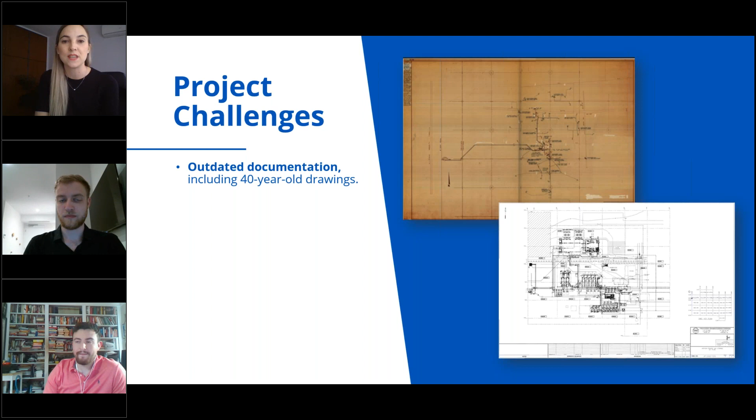So we found 4 specific challenges for this project. The first was the outdated documentation. Back then, when our technician went inside to do the scanning, they provided him with a really large hard drive with a bunch of documentation that was really messy. There were a lot of hand-drawn documents from different areas that we weren't sure where those were located, and other CAD drawings as well. So it was really difficult for us to get nice information to upload to the models.

On the other hand, we had to create a lot of custom modeling. This is because of the nature of the project - it was not content you could easily find in the Revit standard library. So we had to go ahead and model a lot of custom valves and unique mechanical equipment, and that took a considerable amount of time.

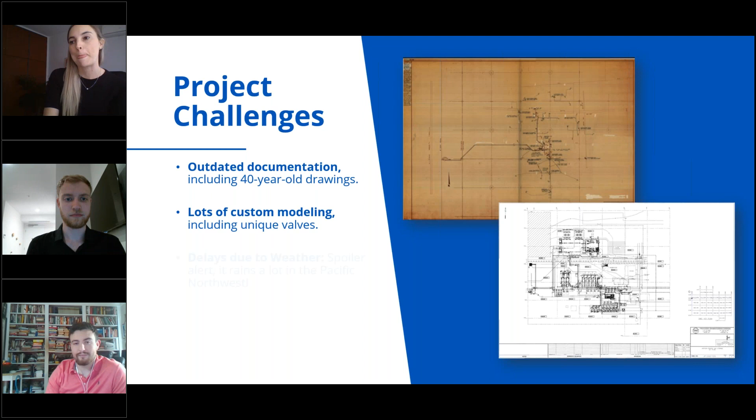Another challenge we found back then was the weather. As you might know, it rains a lot in Washington State. We scanned in November, which is when the rainy season starts, so we got a lot of delay on the scanning due to the rain season.

And the last one was a tight deadline. Our FM team and our YouBIM team needed the models immediately. So we operated under a 1-month timeline, and we had to create the entire Revit model for the project in that time - one single month.

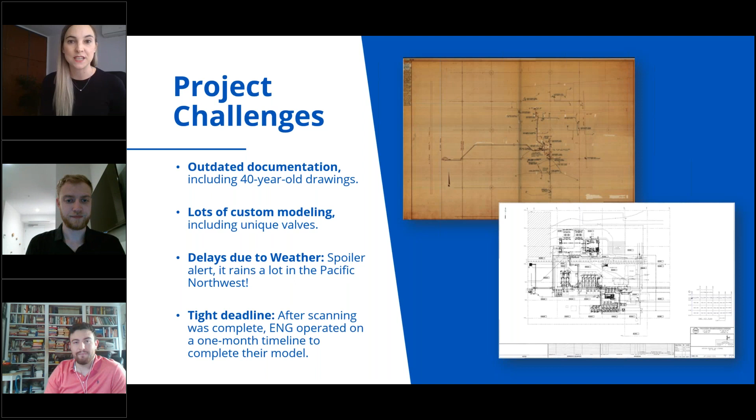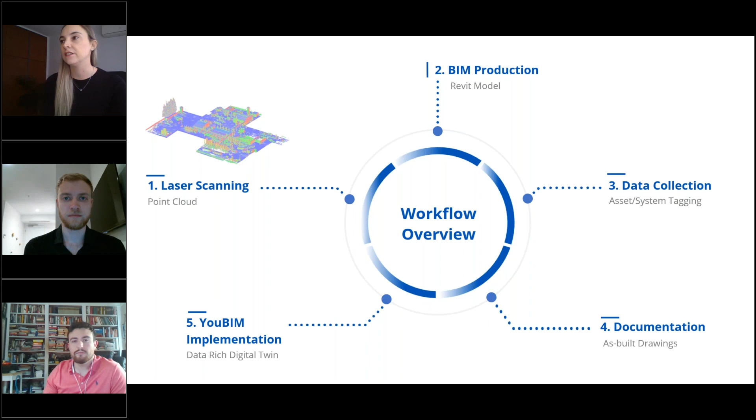I brought this graphic here because it clearly represents what a scan to FM project looks like at ENG. Essentially, we started doing the laser scanning. It's not just about going to a site, bringing your hardware, and starting to scan - there's a lot of coordination that needs to happen before our technician sets foot on the ground. We coordinate all the needs - accommodation, transportation - to make sure our technician has everything he needs when he starts scanning.

For sure, BIM Production has a lot of tools I'll dive deeper into later today, but regular BIM modeling and data collection was key for this particular project. We captured the data from 2 different sources - whatever we could find in the 2D drawings, but we also took pictures of the asset tags, where we could find information regarding serial numbers, manufacturer information, model numbers, and so on.

That data was collected, loaded into the models, and uploaded to YouBIM to enable easier day-to-day operation for our client. After that, whenever we have the systems information, we could set up drawings or filters and provide our client with true as-built conditions documentation for their building. Finally, we uploaded the data plus the 3D model to YouBIM, and that was all.

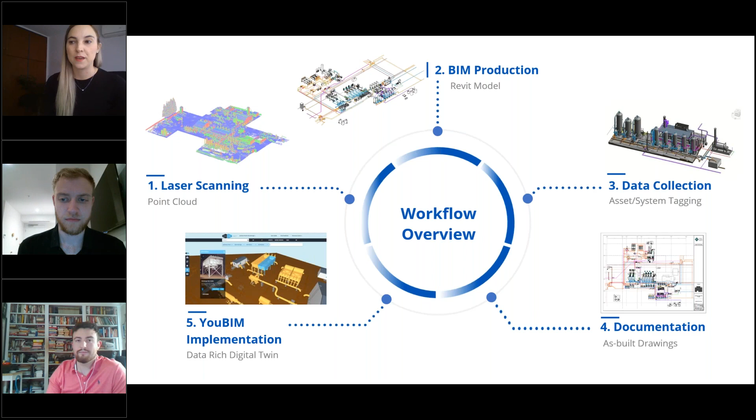This is basically a zoom of our process - how we internally manage this type of project at ENG. Processes and standards are key in our company, not only because they help ensure the integrity of our deliverables, but also to make sure our client has the best possible experience while their project is developed.

So essentially, we start with a project kickoff meeting. We do the regular PMing stuff, talking to a client, making sure we are all on the same page in terms of where are we going to scan, or which deliverables are we going to produce. And finally, the file transfers. If you're familiar with point clouds, you know they are really heavy files to handle, so we need to coordinate that in advance to avoid rework.

As far as the laser scanning, there is a lot of site work, which is the most common one: technician being on site, scanning, defining which specific hardware you're going to use, coordinating the mobilization. What I think is critical here is also the building access, so we need to provide our technician with a contact point, a person that can help him open any locked space he might find while scanning.

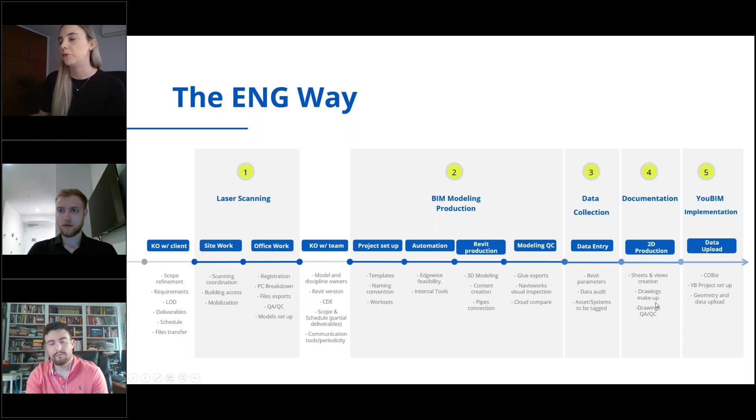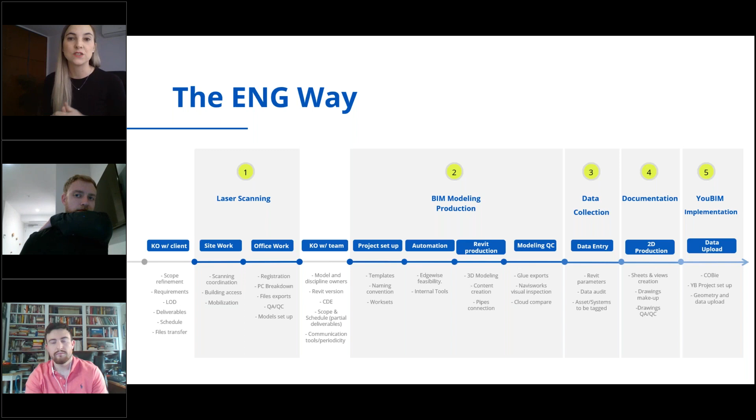After that, just regular Revit documentation, and finally YouBIM implementation. We need to know how we're going to upload the data, how we're going to upload the geometry, and make sure everything is linked together in YouBIM.

Specifically about laser scanning for this particular project, we partnered with Trimble. We scanned more than 200,000 square feet of area, provided more than 300 scans, and it took us one week to scan the entire facility, both outdoors and the small buildings inside. We used terrestrial hardware for that.

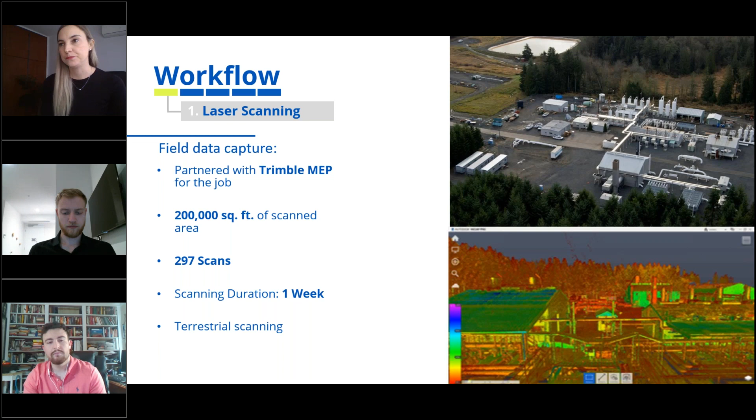I really wanted to bring this image here because this is how our technician structured the data after he completed the scanning. So this zoning here was the zoning breakdown that our client was familiar with, so we decided to just keep that, so it was easier for them and for us to handle the data.

That being said, we just provided them with 13 point clouds. We try to keep them small if possible. We regularly try to keep our point clouds between 5 and 8 gigs, we can say 10 as well. But because we know our machines are really good and can handle large files, you don't know from your client's team if they're going to be able to handle these heavy files.

And also to simplify the Revit work, right? Did you guys, when you scanned this, did you do it in color too? No, black and white. Black and white? Okay, it was too much, right?

Okay, so finally we defined a point cloud origin, and well, that's key. I don't know how many Revit users we have in the audience, but we as Revit users know that Revit doesn't like the geometry to be far away from Revit's internal origin. So we normally try to make sure our point cloud's origin is really close to the building geometry.

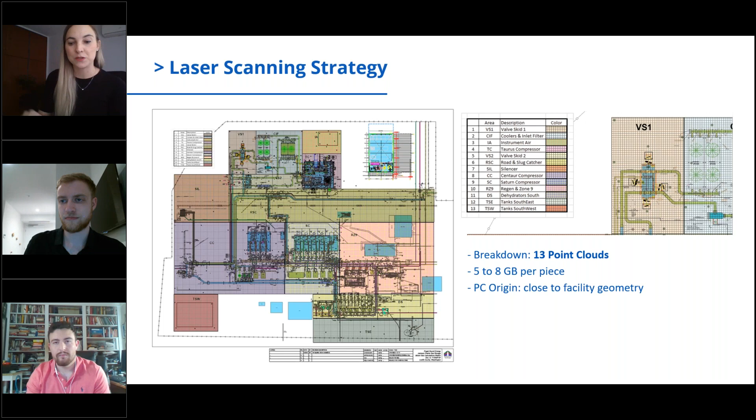So this was a spreadsheet scan location matrix that our technician gave to us. I think it was really nice to count with this, a really nice way of organizing the data. So basically each RCS file was loaded in this spreadsheet, and we were really easily able to identify which area each of them belonged to.

So here you can see also their scan location record. There's a really small green circle here with each scan number. So it was really practical for us to build those RCP files, because we were just using the drawing plus the Excel file, and that was really straightforward.

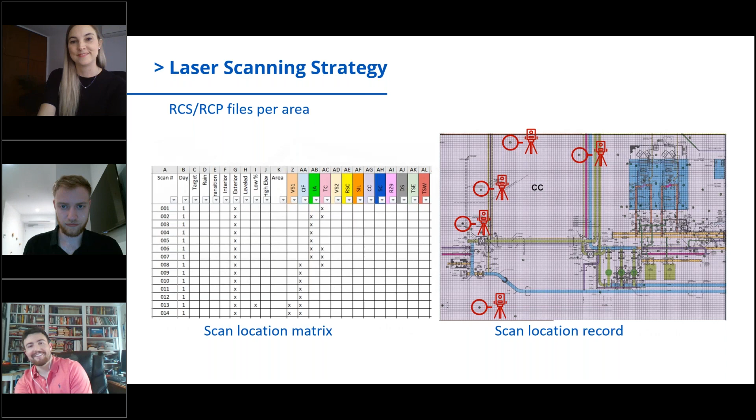I absolutely love that little thing right there. I love that. Right? Now we get to, I think we got the fun part coming up next.

There we go. Yeah, so basically these were the deliverables of this particular project, but this is what we normally ask our technicians to provide: a structured RCP file that we normally use for Edgewise, and a decimated file for Revit work. So we have a lower density file, easy to use to link different applications like Revit, Navisworks, ReCap, or whatever we need.

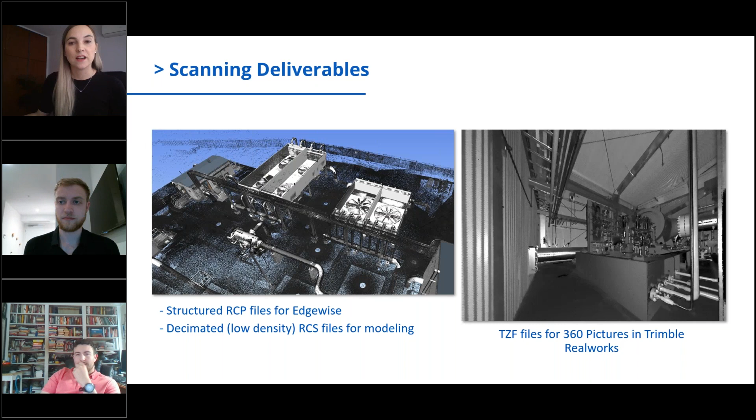And finally, our technician provided TZF files, so we were able to see the 360 pictures with Trimble Realworks to complete the modeling or to check any system tag or equipment tag on site. And that was really helpful, mostly for the modeling scope.

So this was the final resulting point cloud. What we did here was just trim the boundary of our scope of work, because since this was an outdoor scan, there was a lot of data captured by the scanner that we were not really into modeling. So we wanted to keep our modeling times down as much as possible.

I see, so that's everything, like the inside, the outside data, all that right there. That's what you guys did exactly, your final. Yeah, no, that's fantastic. Yeah, we didn't have time to lose.

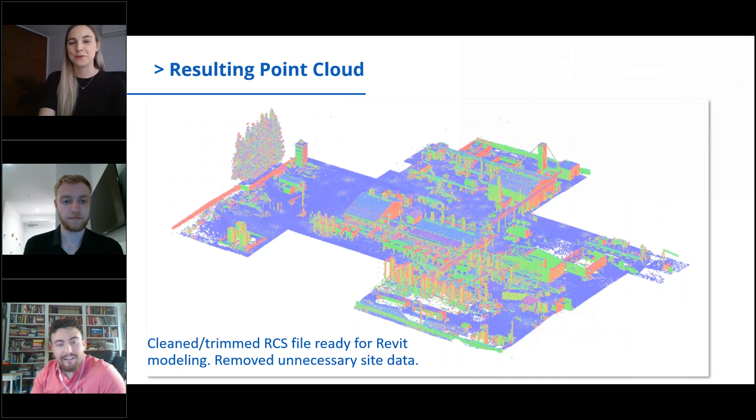So point cloud QC, I'll spend a little bit of time here. Based on our experience, there's a lot of excitement whenever you have your point cloud and the team is ready and you want to kick off the project right now. But something we've learned with time is that you need to make sure your point cloud is perfect right before you place any geometry in your models.

The farther along you are in your project, the more painful it will be for your modelers to correct that if your point cloud has issues. So that is something we learned the hard way, and it isn't happening to us anymore, right?

So registration issues, what am I talking about? We look for duplicated scans, alignment issues. Sometimes whenever we receive point clouds from our clients, they're not aligned orthogonally to our Revit X and Y. We know that Revit doesn't like us to rotate systems whenever those are already modeled, so we want to try to avoid those risks as much as possible.

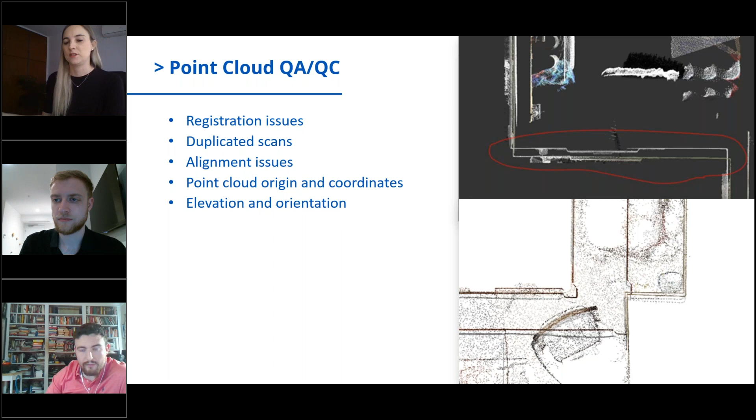Okay, so just to confirm, you guys actually went through and filtered and corrected the point cloud before doing anything further downstream. Yeah, yeah, okay.

All right, so BIM production, let's have some fun here. Basically our Revit model, we model all the architecture and structure to an LOD 200 because our client didn't need more than that. We just use the architecture and structure as context for the drawings, but we're not really into having those with a lot of information.

And we focus on the MEPs, so we model everything up to LOD 350. As you can imagine, in this type of project there is a lot of underground piping that doesn't get scanned or captured whenever you're scanning. So basically we just use the provided drawings for connecting the pipes underground.

And finally, automation. We have some internal automation tools that we developed a while ago. My team is really fond of automating as much as possible, asking our development teams as much as possible, so we can spend more time checking and making sure our model matches our clients' expectations instead of spending a ton of time doing the model manually. So basically we have some internal tools to model the floors, the roofs automatically, and some other stuff to have fun with.

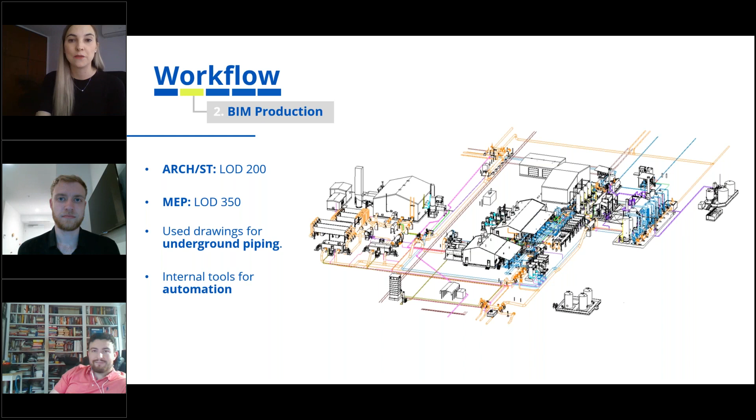As far as the BIM production, we worked with 10 Revit specialists for an entire month. I can tell you we worked during weekends as well because our deadline was really tight. And I'm sure nobody's worked on a weekend before - not anymore. So basically what we did to be able to make it on time was split our teams into different groups.

So we have a specific team for doing all the site work, meaning the topo, the architecture, and the structure. And whenever we have all the pipes processed with Edgewise, that same team was taking care of just connecting those pipes in Revit. We had a separate team for doing the hard work, the BIM content creation work.

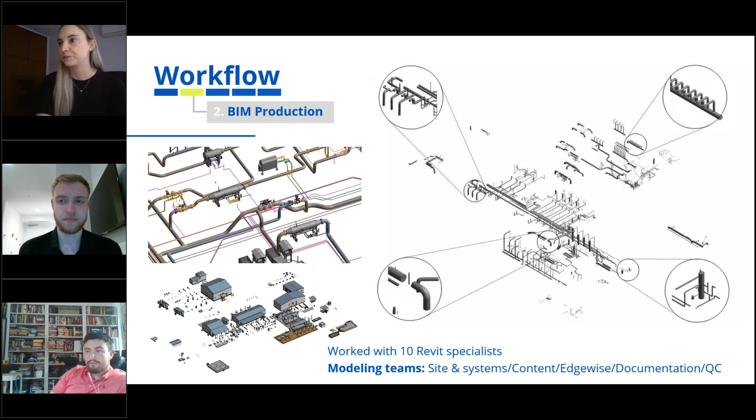We have a separate person working with Edgewise and processing each one zone per day. And we have a separate team working on documentation, and I was working on the QC of each zone back then. All right, that's Trevor's favorite part.

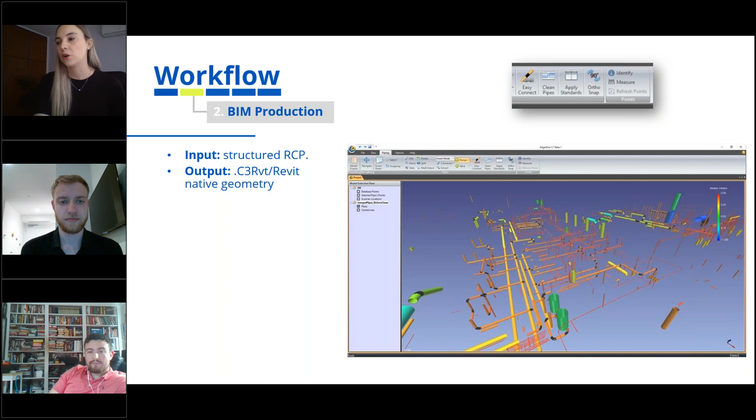Okay, so Edgewise. In order to start processing our data in Edgewise, we just exported the RCP files. We create the Revit geometry - we import our Edgewise content in Revit so we can have Revit native components. For sure, we use the Easy Connect tool to be able to clean up all the pipe fragments and improve all the connections.

And we did a little bit of cleaning within Edgewise, and after we just complete that in Revit, but we want to get rid of the false positives in Edgewise so we don't bring that into our Revit models. So back then, each zone we were able to process in 3 hours.

I know you guys have done a really nice job with Edgewise in the past years, so I think we might have been able to process the entire project in 3 hours instead of the 13 zones now. But back then it took a little longer.

Yeah, how big was each zone? I might have missed this on the earlier slide - how many scan positions per zone about? I don't remember that exactly, but we had a total of around 200. I don't know, we need to do the math, but wow, it was a ton of data, a lot of scans. Yeah, understood.

But the good thing we can say is that we were able to reduce our modeling production for the pipes by 30%, and that was great because we were on a tight deadline, so this helped us a lot. And in the meantime, our team member was processing the data.

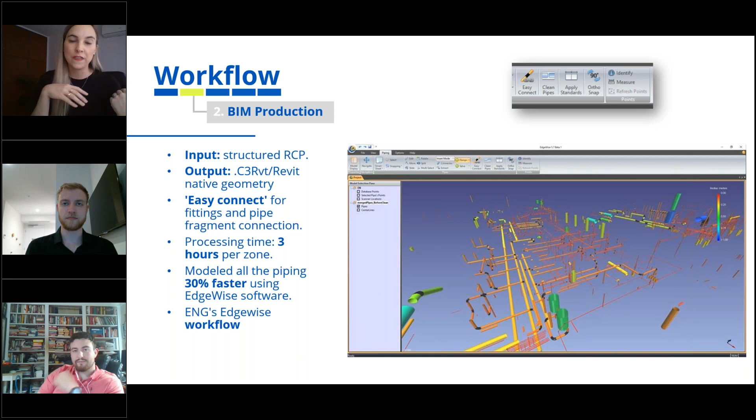So what we normally do is we just import all the geometry into an empty Revit file. We change all the pipes, change all the fittings, and we just link that within our actual Revit model and bind the link. So we don't bring in any garbage or things that we don't want to use or accidentally keep using in our modeling process.

I see, for engineering processing. Yeah, I do see that the image is actually from the beta. So just as a shameless plug, one of the things we're working on in Edgewise is being able to work with unstructured point clouds for automatic pipe extraction, and we're really excited about that.

In this specific project, it would definitely have been a lot easier to just bring in those clipped point clouds you were using anyways in Revit and bring that directly inside Edgewise to extract only the pipe sections in those clipped zones. That's something we're coming out with soon, the ability to use any data, an unstructured recap file or anything else, to get those same pipes without having to bring in the full recap structured project. It's just easier to pass around and clip out whatever you don't want to worry about. So we didn't have that for this project, but we will soon.

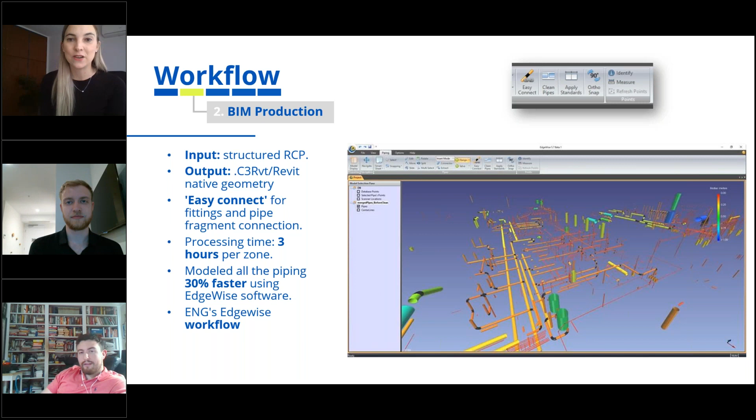Yeah, and we do have the beta, and we are already testing it. I think it's great because we do a lot of scanning, but we don't scan 100% of the projects we model, so we don't always have control of the type of data we receive. So having the possibility of processing any type of point cloud is amazing for us. Yeah, we're excited, so very soon.

So content creation, as I said, we had a specific team working on this. As you can see, we had different mechanical equipment, piping fixtures, plumbing fixtures, and different things that you cannot get in a regular Revit content library.

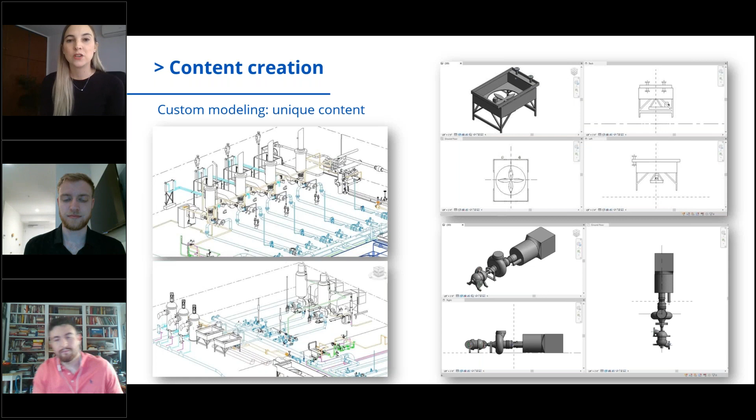So the way we model these things in my team is we use in-place models. We don't actually like in-place models, we prefer not to use them if we can. But the thing is you cannot load your point cloud within the Revit family editor, so it's really complicated to trace the point cloud if you don't have it. So basically what we do is use model-in-places within the Revit environment, and after that convert it into an actual Revit family.

Yeah, and that's basically how we make sure we assign those to the right category as well.

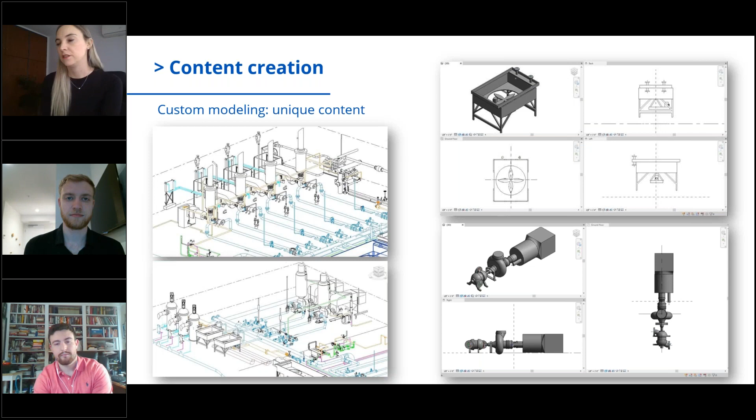Well, quality assurance, I can say this is my favorite part. I'm really picky and I'm so intense with the quality, my team hates me. So basically, we have two ways of checking the quality of our models.

The first one, and the one we use always, is Navis. We use Navis to do visual inspection. It's just flying through the model, checking it, making sure your accuracy is okay. You don't have any missing elements, you don't have unconnected elements or overlapping geometry. So basically, it's just walking your model and seeing what's in there.

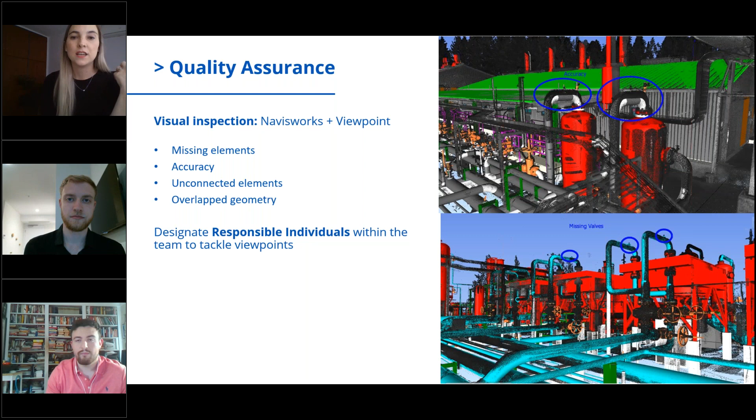Something we learned internally is that you need to assign responsible individuals for the viewpoints, so you can make sure all of them get applied in the models.

This might sound a little silly, but we use search sets and colors specifically to check the Revit categories. If you are going to use your model for facility management, you need to make sure your categories are correct. And the reason I'm saying this is because we normally schedule all the components before we load the data.

So let's say I'm doing a model in place because I'm at home, just working on my model, not talking to my team or my peers. I would say, okay, this equipment is a pipe accessory, but it actually is a mechanical equipment. So whenever you schedule that, you won't see it, you won't be able to manage it, you won't be able to load that data.

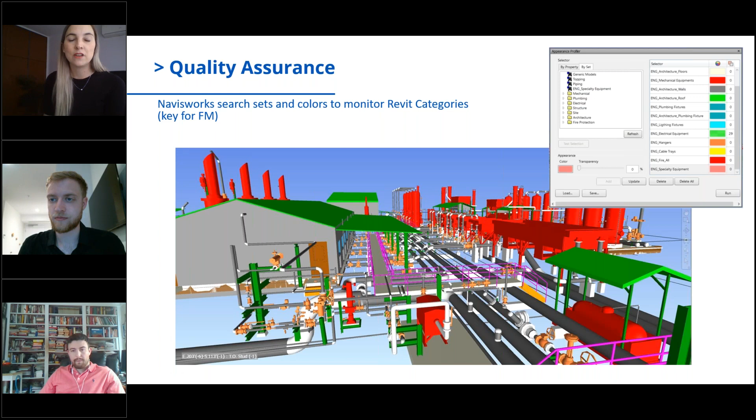And this is key, that's why we use colors and filters to assign those to the different components and categories. So here you can see all my red components are mechanical equipment, all the orange stuff is actually pipe accessory, and we can do that with plumbing fixtures and so on. So this is a really easy way for us to turn the geometry on and off and easily detect if we've made any mistake in there.

So for automatic QC, we use Cloud Compare. This is a free software. If you have used it before, it has a bunch of features and tools that we actually don't know, we have no idea how to use them. We actually use it only for comparing our model against our point cloud and detecting missing or inaccurate elements.

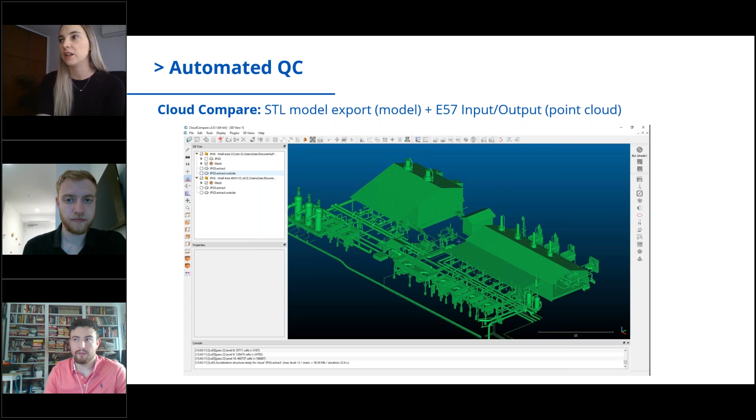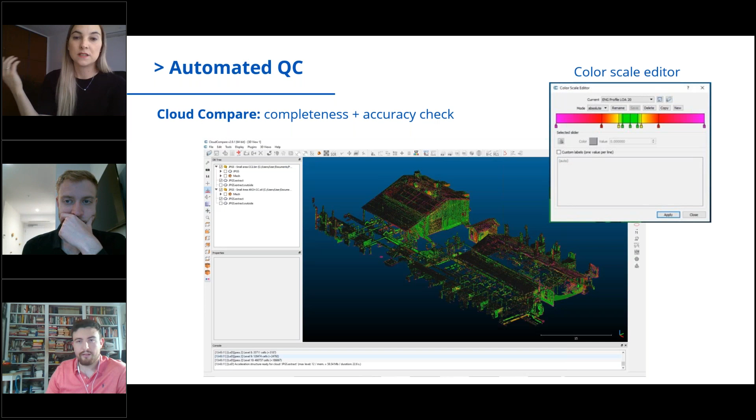So basically, we export an STL file from our Revit model, and an E57 file from our point cloud. In Cloud Compare, we set up our colors, our accuracy and tolerances, and we colorize the point cloud depending on whether our accuracy is good or not, or if we're missing elements. So you can easily go and identify what is not accurate or is missing in your model.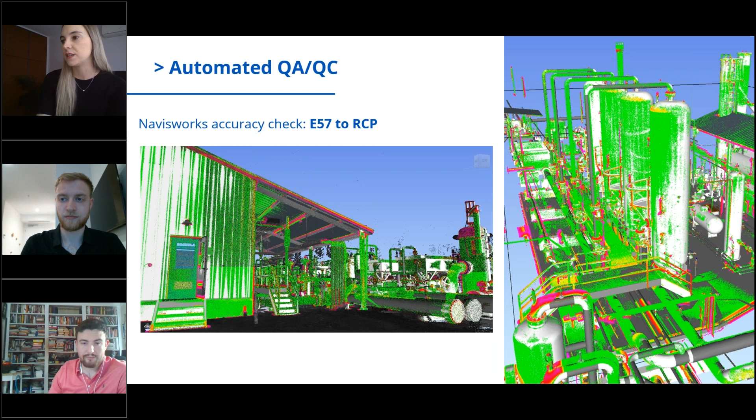Here you can see an accuracy issue as well. So you can start creating viewpoints and marking that in your model so you can later get those fixed. And finally, you can just import that colorized data into your Revit model. So it's really straightforward to just go and see the red points and complete whatever is missing. This is basically how we do QC in my team, and I think it's working really well.

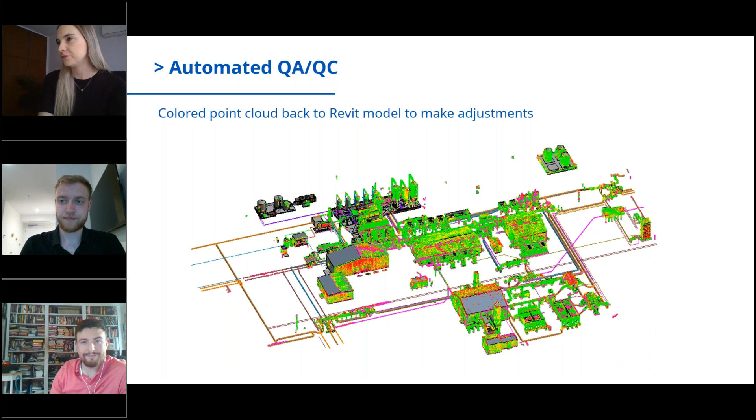So data collection, this is pretty important if you're going to use your model for operations. Your data needs to be organized, clean, and you need to make sure you understand the relation between the type of data you are uploading.

So we upgraded this model to an LOD 500, and we loaded all the assets and systems information in our model. After that, we can just plug that into YouBIM. Basically, as I said, serial numbers, model names, manufacturer's name, and system names. These were the parameters in our components where we started loading all that information.

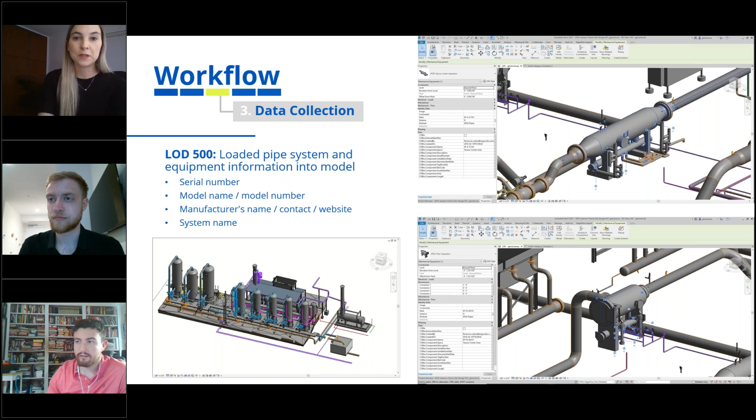As you can see here as well, we have already assigned the systems information. There is one system here in orange, and another in purple. So we can already know that our model is complete and ready for FM.

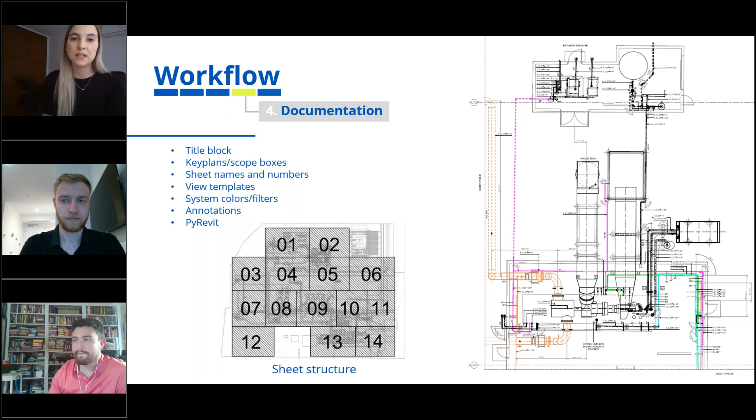Before we go to the YouBIM implementation, we did the documentation. As you can see, we used the same zoning, so our client was comfortable with that, was really used to working with those zones. We started setting up title blocks, key plans, and all the boring stuff whenever you're documenting. We added a little bit of fun because we used PyRevit. With PyRevit, you can populate your views and start populating your sheets, creating names and numbering automatically. So we gained a lot of time with that.

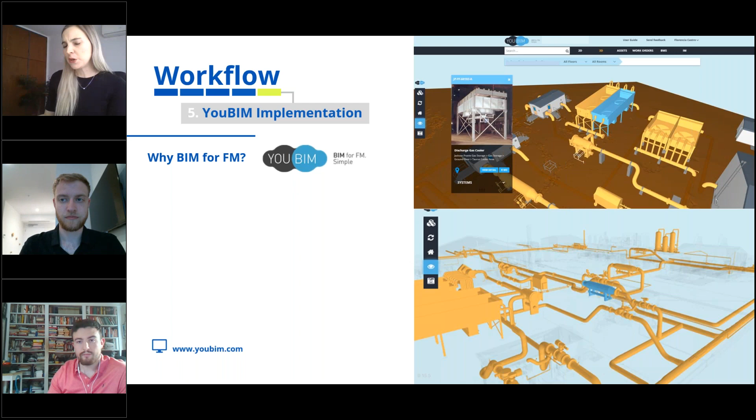Finally, YouBIM implementation. So a little bit about YouBIM. It's our proprietary software, and it's a cloud-based and centralized model with a really, really intuitive way of using it.

So basically, you can use it to quickly locate your critical assets in case of emergency. Let's say you have a flood and you don't know where your shut-off valve is. With YouBIM, you can identify, go ahead, select the asset, and know which room it belongs to and on which level you should find it. So you have all this centralized information in there.

You can also schedule preventive maintenance cycles. You can also train your new personnel in terms of how you're going to operate your project. You can also use it for replacing equipment parts because all the information will be loaded in your asset. And finally, create work orders and check the status of those.

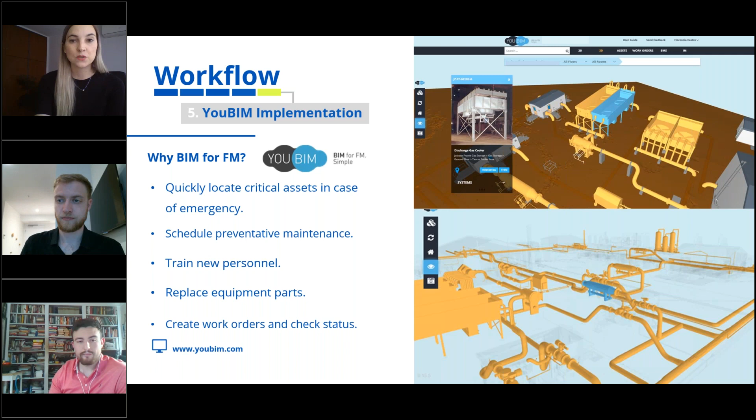This essentially is a way of setting up relations between the data. Let's say this asset is located in this level, in this particular room. It has this specific properties or information, like serial numbers or all the information. You can connect the data in COBie and make sure it is organized enough and clean enough before we upload that to YouBIM.

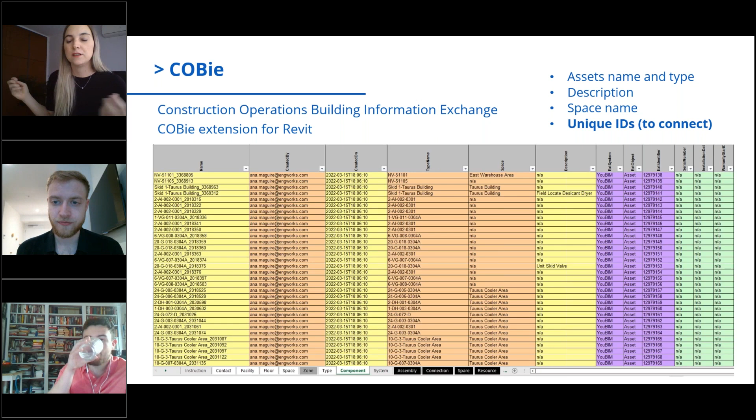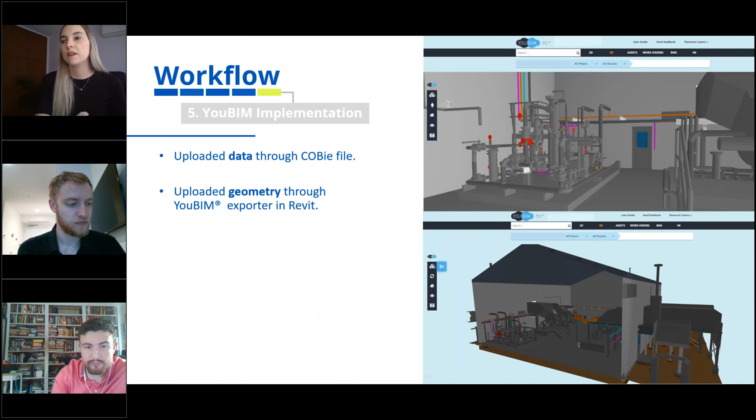So as I said, you upload the data to COBie. You upload the data to YouBIM through a COBie file. You will upload the geometry and the 3D drawings as well to YouBIM through the YouBIM exporter in Revit. After that, you have the data plus the geometry up there.

You will start building the systems and subsystems. So you have that information in the COBie file, but you need to start setting up the relations between them. Let's say you have a plumbing system, and within that, you want to specify your cold water, your hot water, your vent system, so you can set up all of that together.

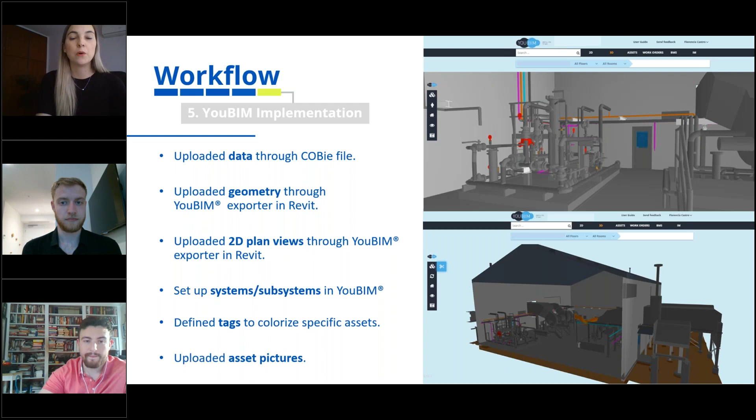And finally, you can define tags, so you can display different colors for the systems or for the assets and so on in YouBIM. And you can upload asset pictures, so you not only have the data, but you already know how the asset looked like. That will really help you identify the asset on site.

So with that, we were able to get a data-rich digital twin in YouBIM. I chose this example because you can see I have selected a valve here, and I have all the information, the operation information for that particular asset. So all the data is centralized and the model is easy to navigate.

So for any person that is not a Revit user, he or she can have the data available all the time. He or she can open it with a cell phone, a tablet, or on the machine.

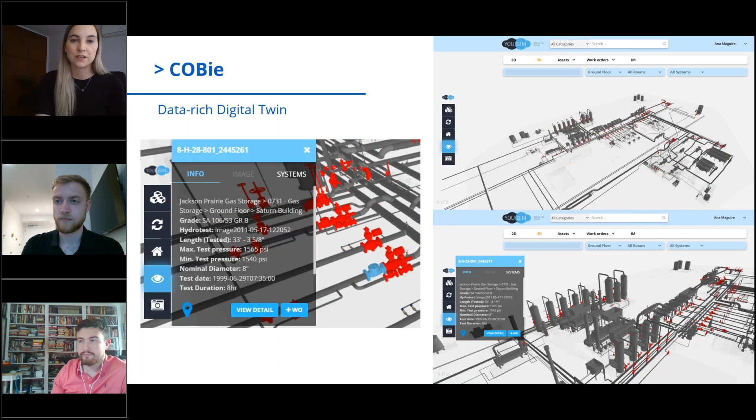So it's pretty straightforward. Finally, how did we hit the deadline, how we managed to complete the modeling stuff in one month. As I said before, we just split the team into different parts. A team was dedicated to pipe extraction, another team for the pipe connection and site modeling, content creation, documentation, and QC. We did the same with the areas.

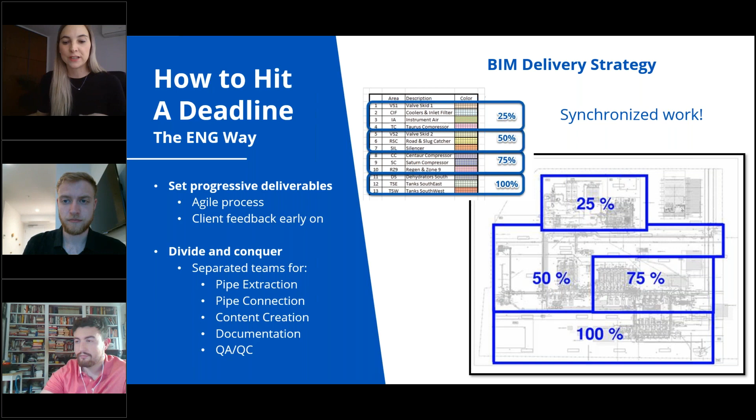So we just split our project into 4 different parts, and we set up partial deliverables for our client. Basically, this is how we managed to coordinate and synchronize within the teams.

So here you can see we have team 1, which was working on the pipe extraction. And while this person was working on that, team 3 was already modeling the topo, the architecture, and everything, all the context around it. And whenever those pipes were ready, that same team was doing all the connections between them and just cleaning them up.

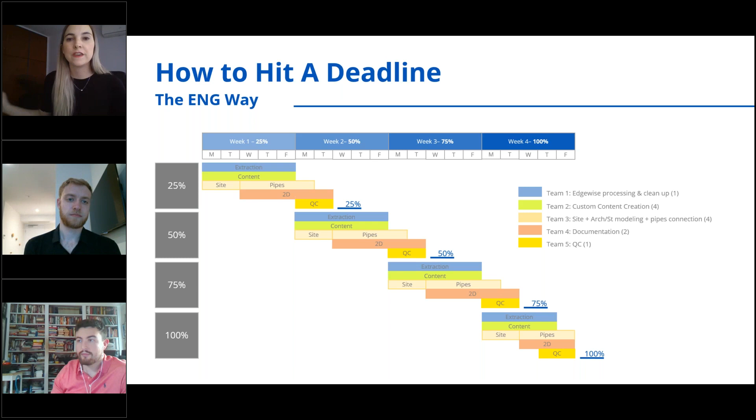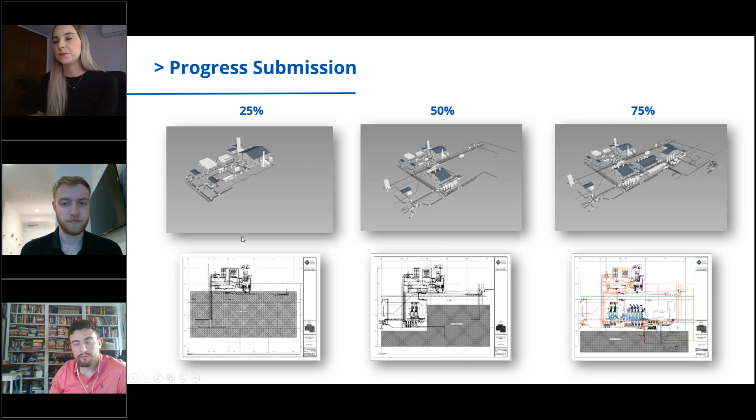These were our deliverables. This is a true story - this is how we delivered. Every Friday we delivered one part of this progress, and this is how our final BIM deliverable looked like back then.

Well, I haven't gotten to the end - I have some tips that I wanted to bring up here. It is not as-built unless you scan your project. If there are some individuals here that haven't been exposed to point cloud and laser scanning, I would really encourage them to do so. If you're a building owner and you're not sure if you want to scan your project, I would say just go ahead and do that.

I get a lot of questions from our clients, like, is it too expensive? Is it worth it? Should I scan my project? And I can say it's worth every dollar. My advice would be to push your BIM managers, your BIM coordinators, to request that and implement this in your project, because it will save you a lot of headaches in the future.

Daily meetings, we did that back then, and we keep doing that mostly now because we are remote. This is essentially so the team can know what the rest of the team is doing. If they have any question, any issues, we can review that. We normally take between 15 and 30 minutes per day. It doesn't take more than that, but you can make sure if there is an issue, you can detect it as soon as possible and identify if you have any possible schedule deviation.